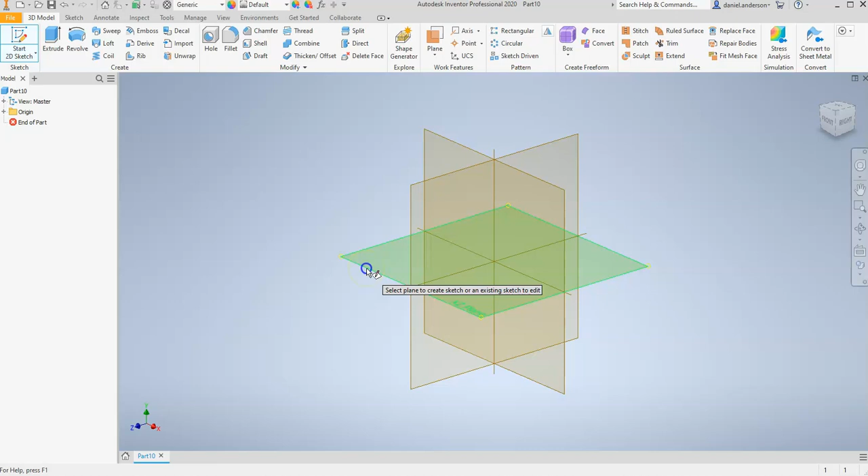So let's go to the top plane, this XZ plane, and make sure top isn't vertical. Make sure it's horizontal so you can read it left to right, and grab your line tool. And if you imagine what the blade of a sword looks like from the top, it looks kind of like a diamond shape. And so let's sketch that out.

Don't worry about making it perfect. Just sketch out a quick sort of diamond shape. Make sure you get that green dot. And hopefully you can look at this and see what I mean from this diamond shape. And once you've got the general outline, let's go back in and make it perfect. And to do that, let's use a new tool.

We're going to go up here into our ribbon on the top right and find our construction tool. And make sure you still have your line tool selected. I want you to connect the left corner of your diamond to the right corner of your diamond. And you'll notice that we have this dotted line. This is called a construction line.

Do the same thing from the top corner to the bottom corner of your diamond. And again, you'll see that this is a dotted line, not a solid line. And so what are these construction lines used for? Well, they're really cool because they allow you to manipulate your 2D geometry without affecting your 3D features when you finish your sketch. And so I'm going to hit right-click OK.

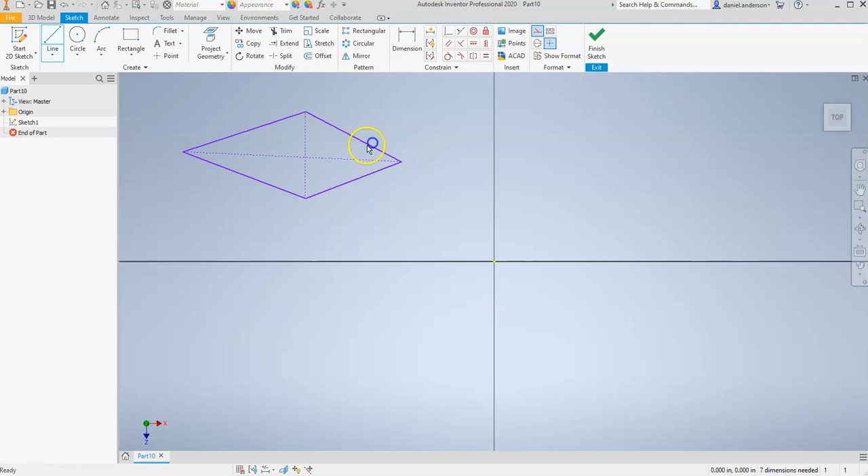And I want to make sure these construction lines are vertical and horizontal. And so let me grab my vertical constraint and let me click on this line going up and down. And it'll either make it vertical or it'll let you know that you already have a vertical line. If that happens, just hit cancel. I'm going to try the same thing with my horizontal line. I'll go to my horizontal constraint and select this line. And again, it'll either tell you the line is already horizontal or it'll correct it for you.

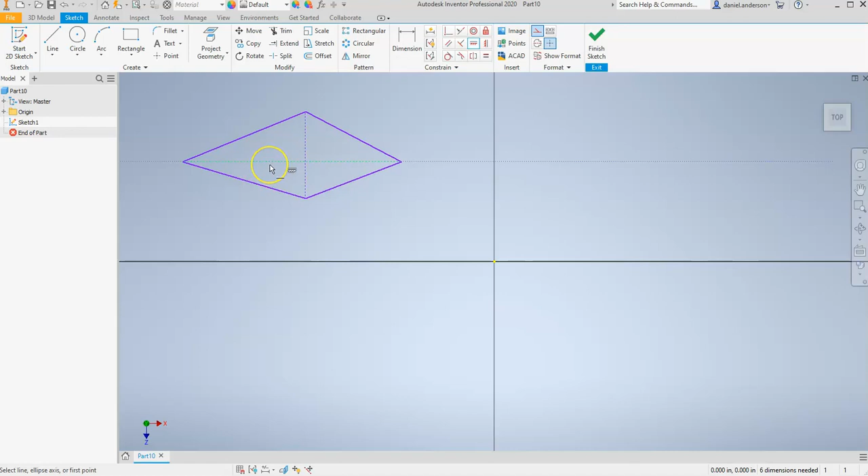I also want to make these edges equal. So I'm going to go up here to my equal constraint. And I'm going to tell these left sides to be equal. And I'm going to tell the bottoms to be equal. And I'll tell the right sides to be equal. And you'll notice it tells me that I'm over constraining the sketch. And so it looks like making these three equal made it impossible for this one not to be equal. No big deal. So now we have all four sides of our diamond shape equal. We'll go to right click OK.

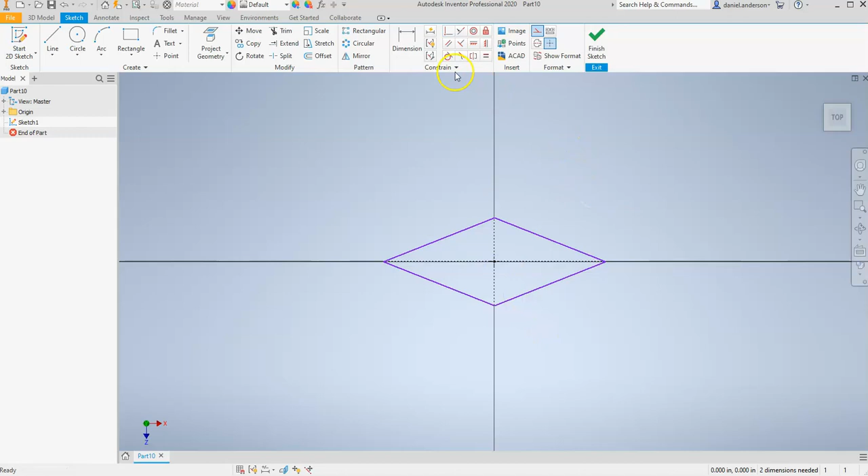And the next thing I want you to do is go to your point tool and put a point down right at the intersection of these two construction lines. Grab the coincident tool and tell this point to be coincident with the origin. Right click OK, and then we just need to tell it its size. So let's go to dimension. Let's go from the left side all the way to the right side, and let's tell it to be 3 inches wide. I'll zoom in and I'll go from the bottom to the top. And I want to tell it to be 0.75 tall.

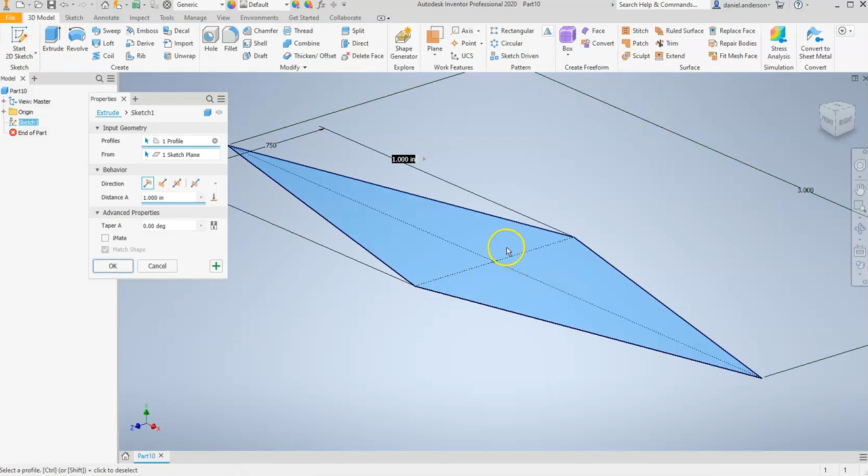And then I'm going to finish my sketch, and I want to extrude this shape. And so I'm thinking about how long the blade of a sword will be. I'm going to tell this to be about 30 inches. And I'll zoom out so I can see what I'm looking at here. And okay, if you look at it, it kind of looks like a blade, but let's make it look a little bit more realistic. And to do that, let me show you a new tool in your extrusion feature.

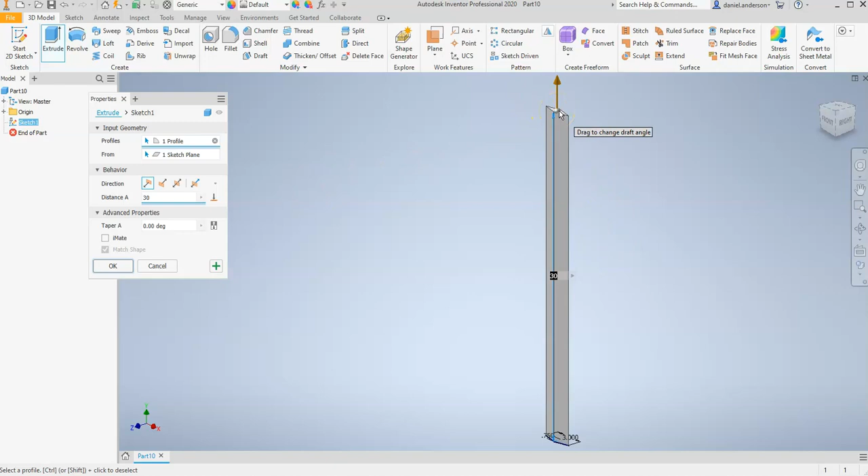It's called the taper. So if you see that gray circle right there, click on it. And now we can change the angle in which it extrudes out. So we can make it wider, or we can bring it in and make it narrower so it kind of becomes this sort of sharp shape. And so we can go from distance to taper in here, or we can go from distance to taper over here. I'm going to click on it over here.

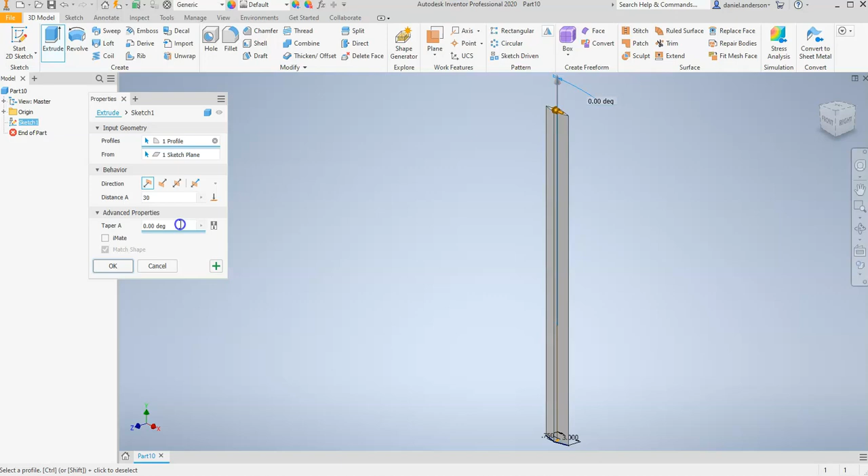And I'm going to tell it to be, I don't know. Let's see what happens if I make it 10 degrees. You can see it gets very wide. And so it extrudes up 30 inches, but it extrudes out at this 10-degree angle. And if I want to go the other direction, I can type in a negative. I could say, let's just say -1 and see what happens. You can see it goes inward. It has this inward taper.

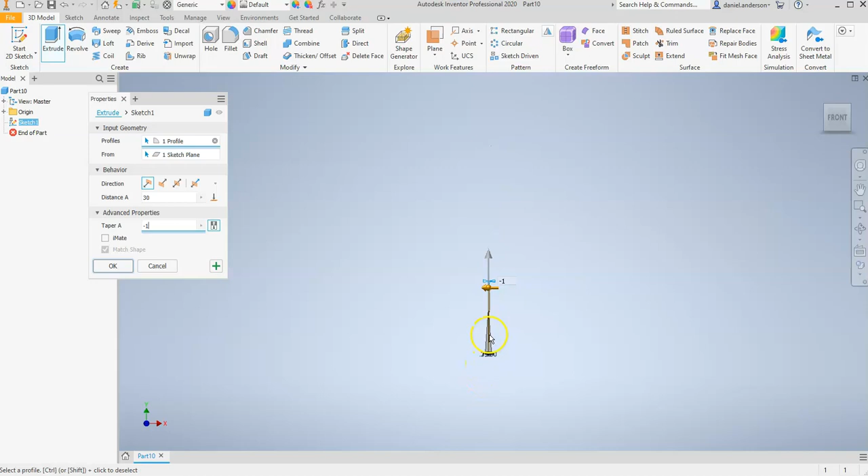I want it to go out, but I want it to be really small. Let's try 1 degree out. And that still doesn't really look realistic. It doesn't look like a sword. Let's try making it 0.5 degrees. And if I look at that, it kind of looks like a sword. Let's hit OK. But we need that sharp point on the end.

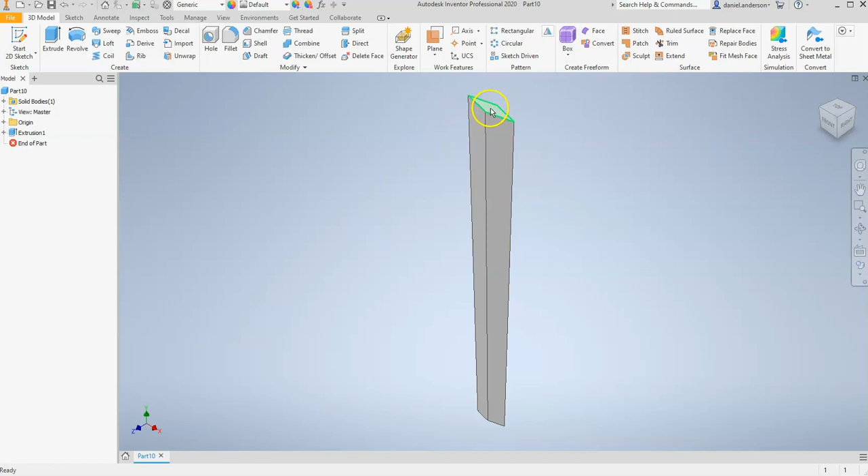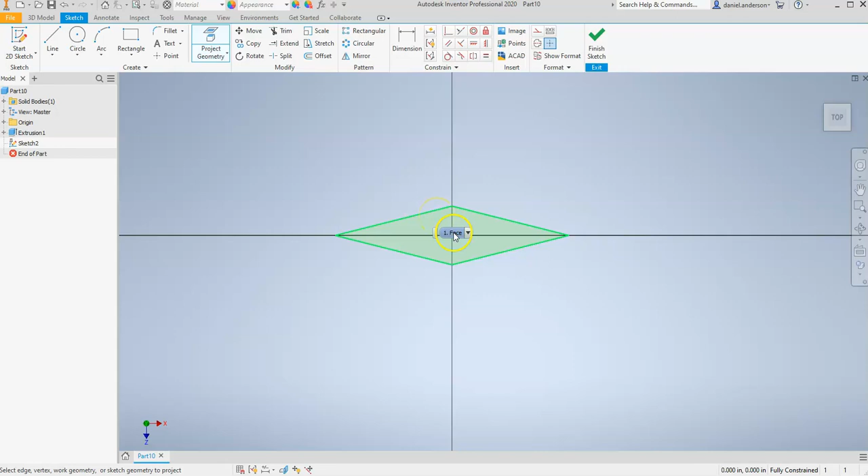So let's right click on this top face and hit New Sketch. But instead of grabbing our line tool and trying to sketch out another diamond shape for ourselves, let's go up here to our Project Geometry tool. And what this allows us to do is it allows us to turn on previous geometry in the sketch. And so I want to hover until I see the entire area of this shape highlighted and click. And so now I have that previous shape sketched out for me.

I'm going to go to Finish Sketch, and I'm going to hit Extrude again. This time I don't want it to come up 30 inches. This time I just want it to go up 5 inches. So let me delete this and type in 5.

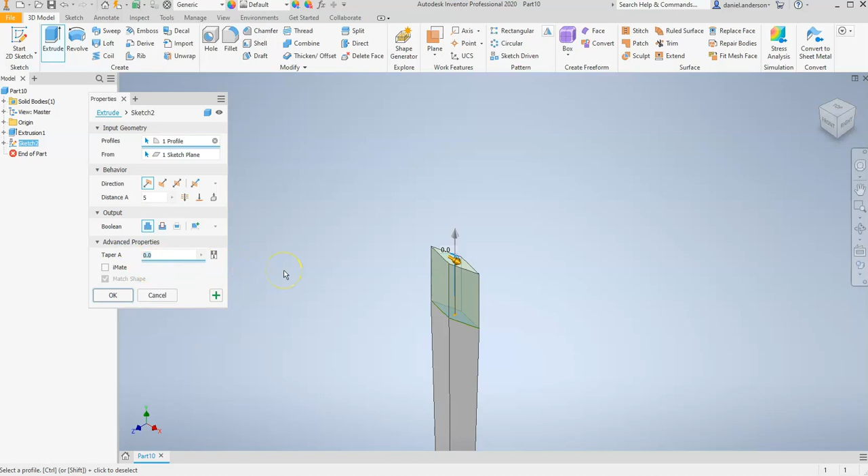And I don't want it to extrude outwards this time. This time I want it to come in to get that sharp point. And so let's type in -5 and see what happens. And it turns it in. It kind of looks like a sword, but it doesn't really have that point. And so let's double that. Let's make it -10. And oh wow, that actually looks really good. And so we got our blade of our sword.

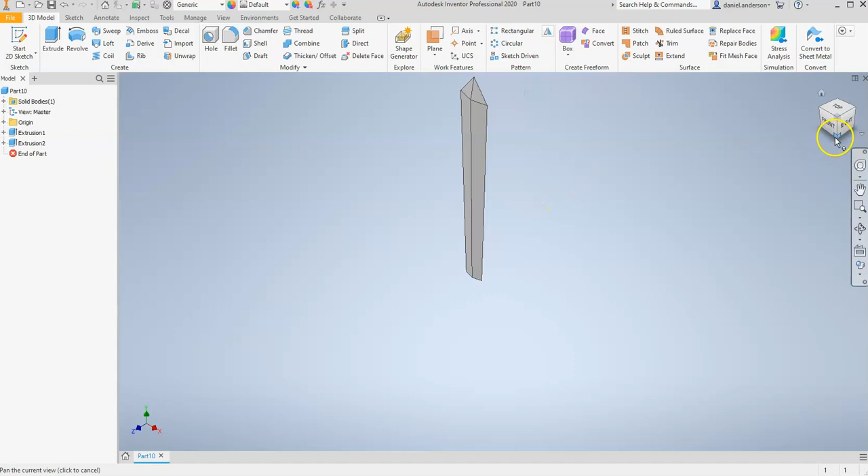Let's hit OK. And so then all we really need is the handle. So let's go to the bottom. And we'll start a new sketch down here. And let's rotate the view cube so bottom is turned left to right. And let's zoom in and grab our rectangle tool.

Now you'll notice when I try to draw my rectangle where the handle should be over my shape that I've already extruded, it kind of highlights these previous shapes that I already have. What it's trying to do is trying to project this geometry. My selection tool is trying to magnetize those lines. If I do, it'll lock my shape onto those lines. I don't want that, so I'm going to sketch it over here to the top left, and I'll center it in a second after I'm done dimensioning it.

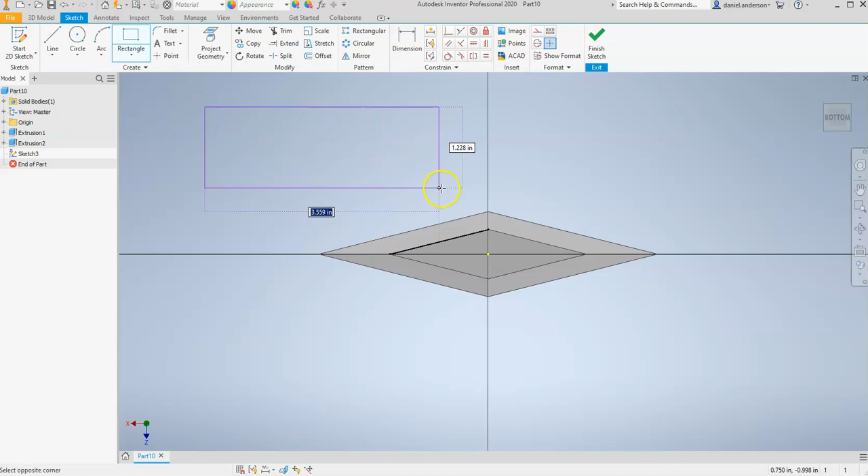It's very important that this is not a construction line rectangle because you can't extrude a construction line. And so if you had construction lines still turned on, your rectangle will look like this. We can't use that to extrude anything. If I finish my sketch and I try to extrude that rectangle, I can extrude this one because it's a regular rectangle. But since this one used construction lines, your 3D features do not recognize it as an actual shape.

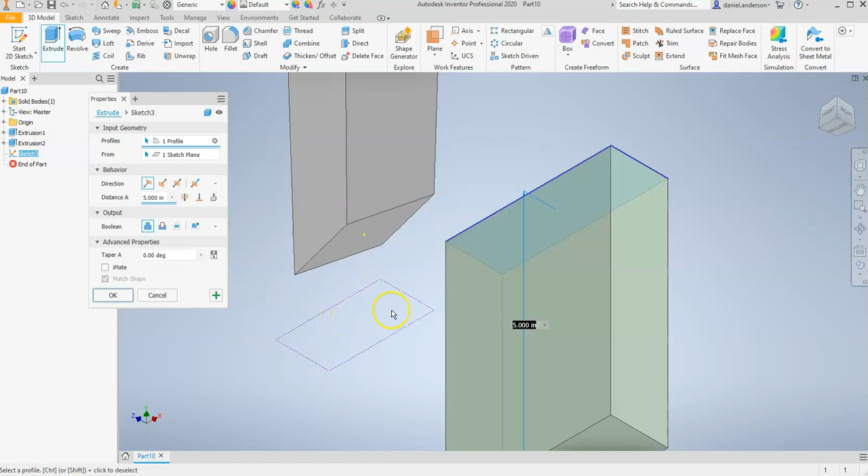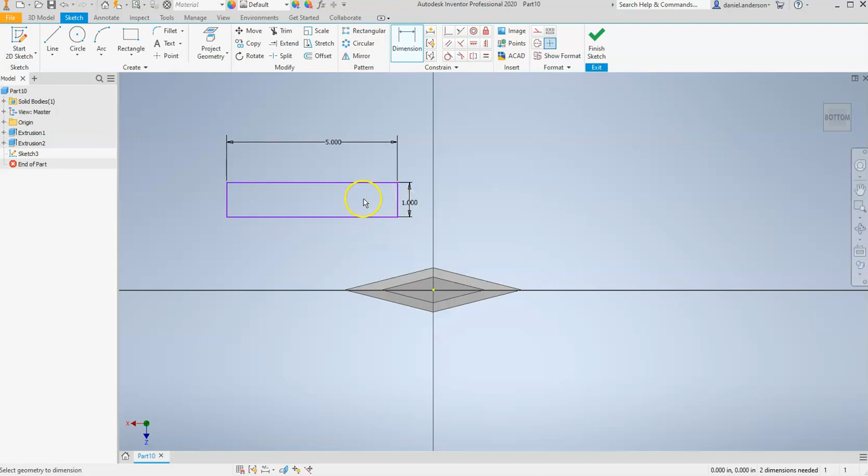And so I'm going to hit cancel, and I'm going to go back into this sketch, turn this sideways and zoom in, and I'm going to delete this construction line rectangle for myself. And let's add these dimensions to this rectangle. And so I want this rectangle to be 5 inches wide, and I want it to be 1 inch tall. And again, make sure this rectangle is not made out of construction lines.

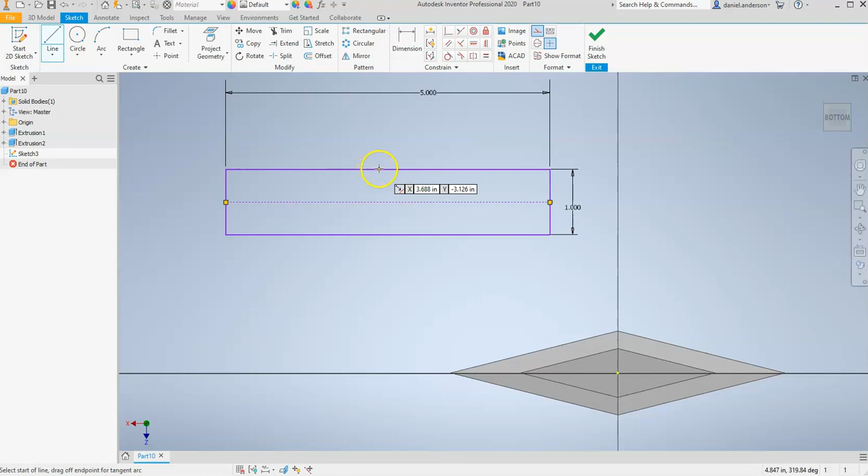And then to center this rectangle, let's use construction lines again. So I'll turn on construction lines, go to my line tool, and I want to find the center of my rectangle here from bottom to top. Once you see that green dot, click and drag over here and get that other green dot. And so this line should be a construction line, but your rectangle should not be. And let's do the same thing from the other way. Let's find this center, get that green dot, click and drag, get that other green dot and click, right click

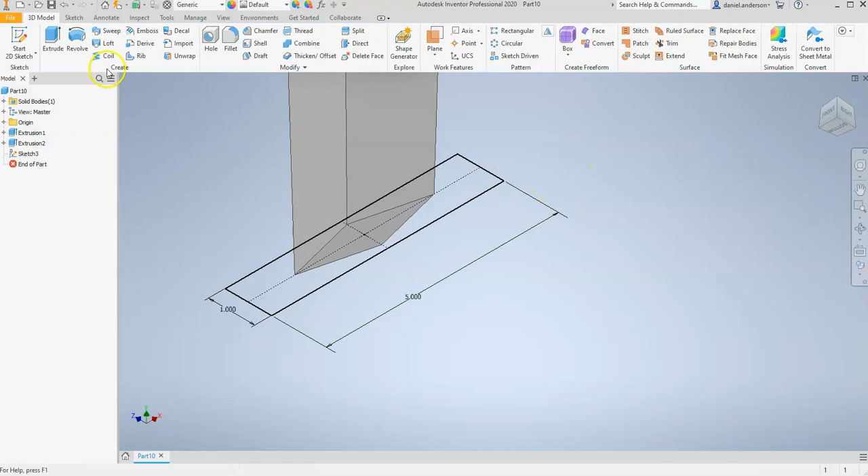OK. And I'm going to find my point tool and put it down right here in the center. And I want to tell this center point to be coincident with the origin. And so now we have a fully constrained rectangle. Let's finish sketch, go to extrude, and I want to extrude this to be 1 inch with no taper or a 0 degree taper, and hit OK.

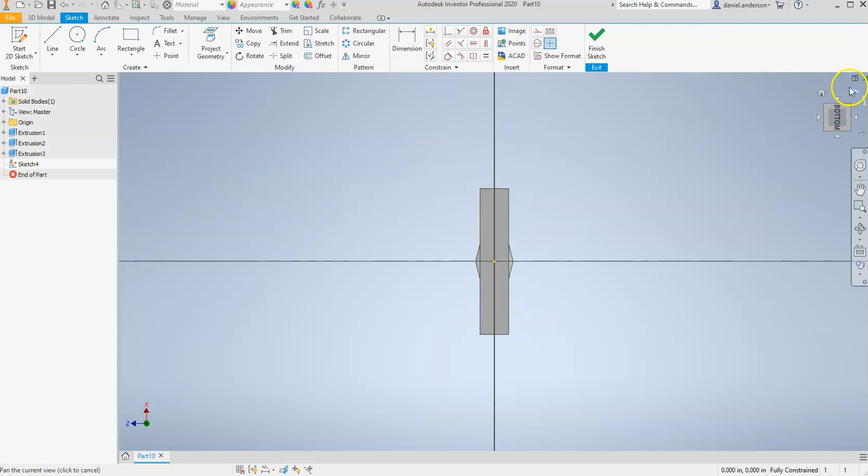And so if we look at what we got so far, we're almost done. We just need the grip on our handle. So I'm going to start a sketch on this bottom face, and I'll turn it sideways so I can read bottom left to right and zoom in. And to draw our handle, let's go underneath rectangle, and let's find our center to center slot, which is a pretty cool tool. But if you notice when I hover over the previous shape, it tries to project those lines. It tries to lock onto these previous lines.

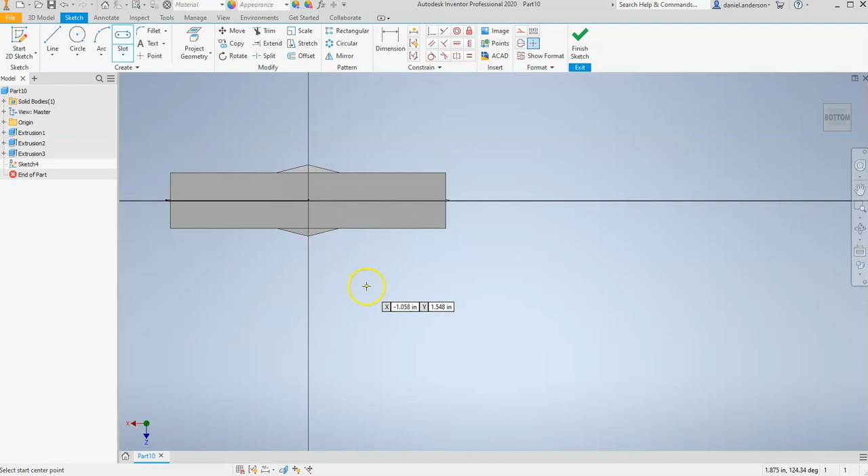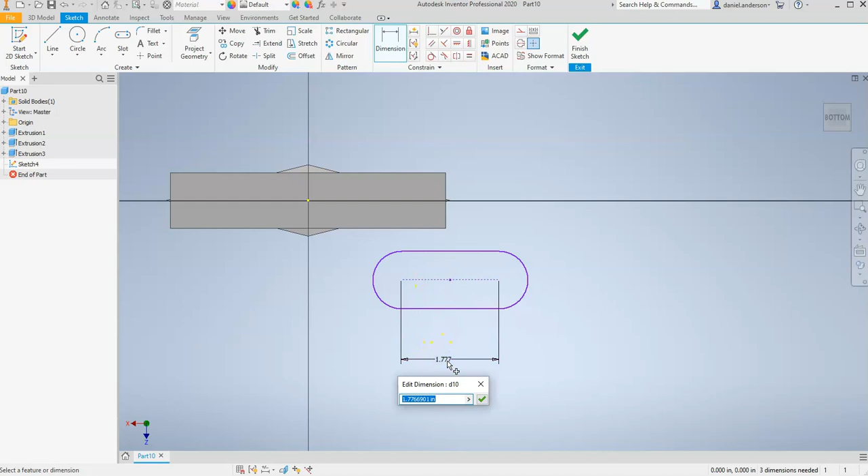So let's go off to the bottom right or anywhere off to the side here, and let's draw this slot. And to draw it, let's click and drag to the right, and then click again. And then click a third time, and we can draw this slot. I'm going to right click and hit OK. And let's give this slot some dimensions. I'm going to click dimension and click on this line, drag it down. And I want this slot to be 0.75 inches wide.

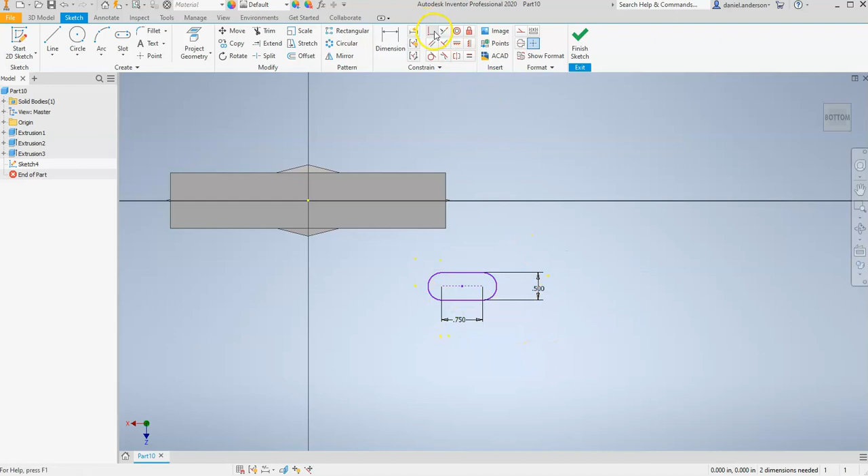And if it moves to the center, don't worry about it. Right click OK. You can click and drag it and move it back where you want it. Hit dimension again. I want it to be up and down, a dimension of 0.5. Right click OK. And then all we need to do is center it. So go to our coincident constraint. I'm going to click on this dot and click on the origin. And now we've got it fully constrained on here. We can finish our sketch.

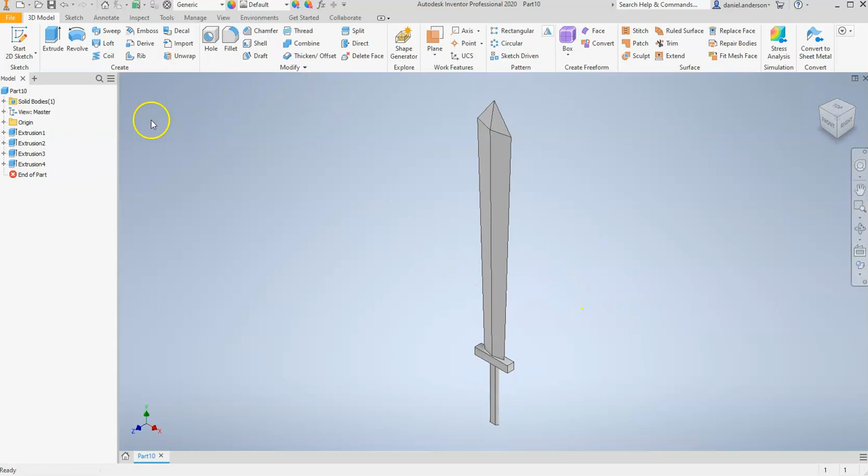Hit extrude and tell it to go 8 inches down. Hit enter. And let's look at what we got. And it looks like we got a pretty cool looking sword. Make sure you save it. I'm just going to call it sword. Hit save. And we are done with this shape.